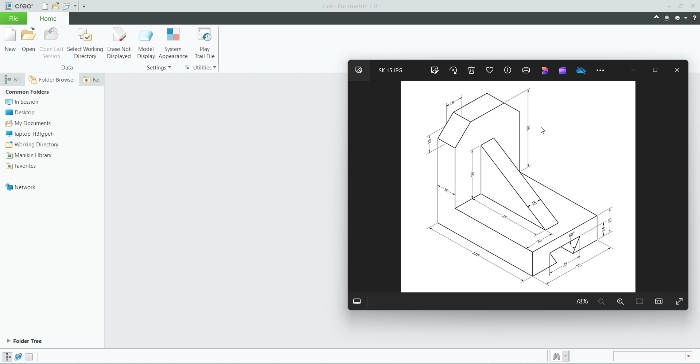The base dimension is 110/75 and there is one more flange 80, thickness is 20.

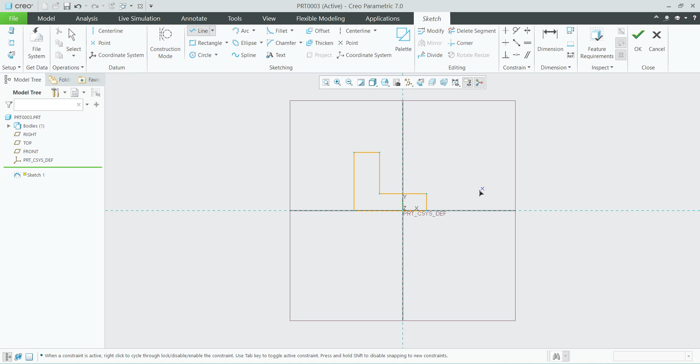Select front plane, sketch, select line, give the dimensions. This is 25 mm, and here to here 20. This length is 110. This is 80 plus 25, 105.

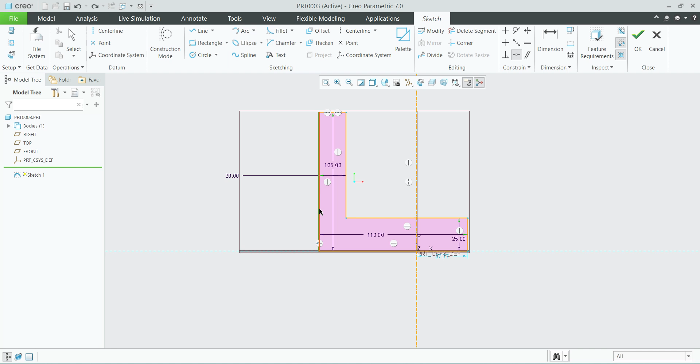Here give the constraint. So finish sketch, select extrude, here select symmetric 75 mm.

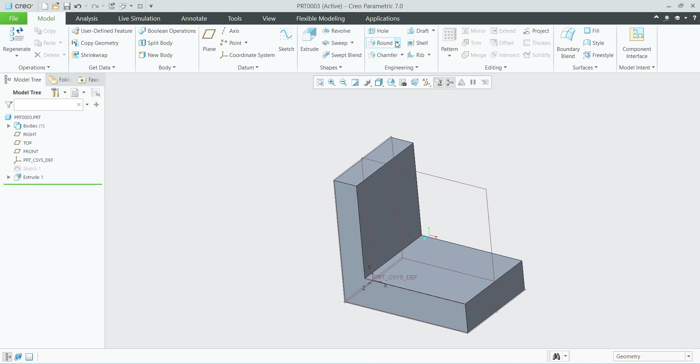Next there is a 18 into 18 chamfer, select chamfer 18 mm, select two edges.

Next there is one rib, thickness is 15 mm, dimension is 50 and 75.

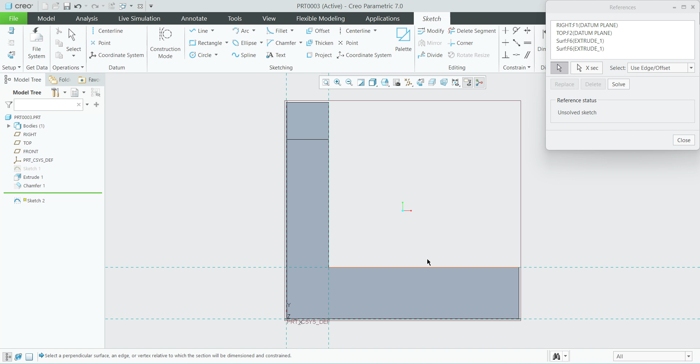Select the plane, sketch, select reference, select line, give the dimension, 75, 50 mm.

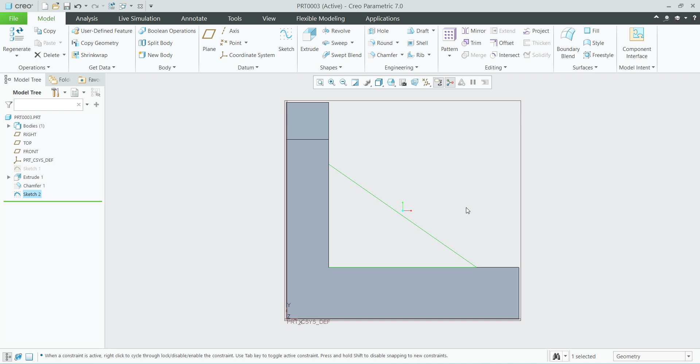Finish sketch, select profile rib, thickness is 15 mm.

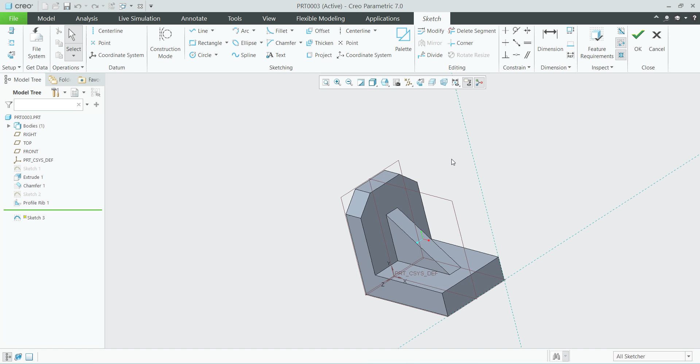Next there is one cutout 35, height is 14 mm. Select this surface, sketch, select the line, select reference first, select this, select line.

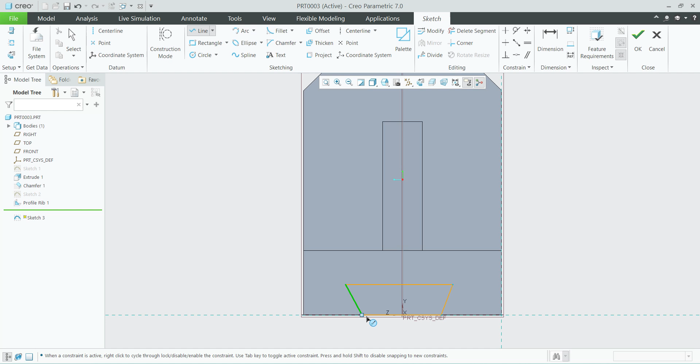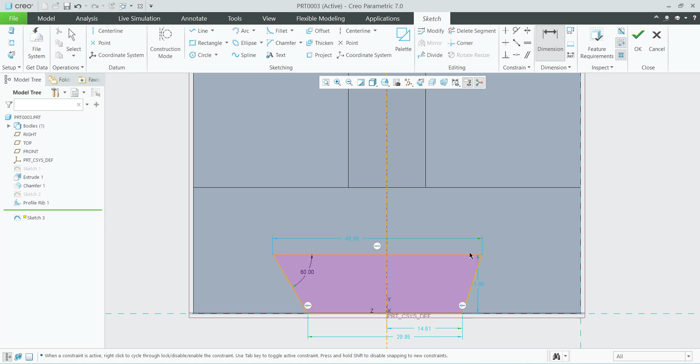Here create center line, give the dimension 35, this is 60 degree, this length is 35, height is 14 mm. This we can give 0.

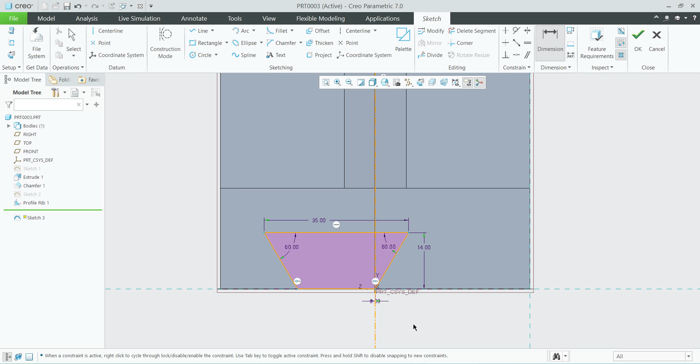Select this, okay, finish sketch, select extrude, remove material, reverse direction, here select through all.

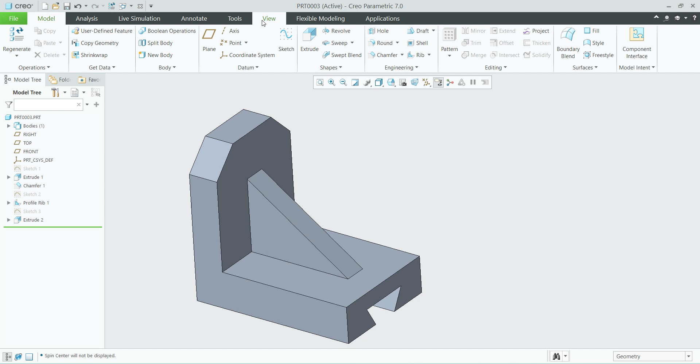We can assign the material here. Go to view, select appearances, here select name and thumbnails. You can see there are all the materials here. You can select which material you require as per your projects.

I will go with aluminum. Select the part, assign.

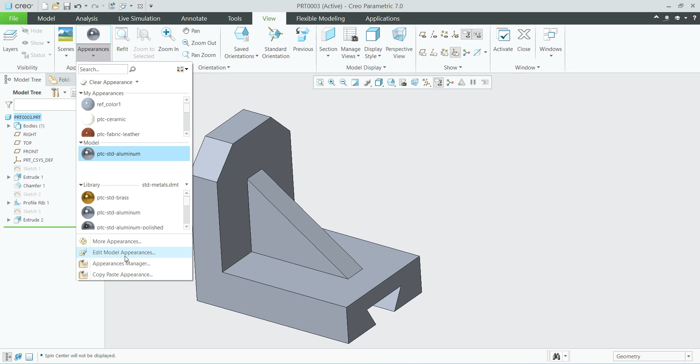So go to edit model appearances, color. We can edit the color here like this.

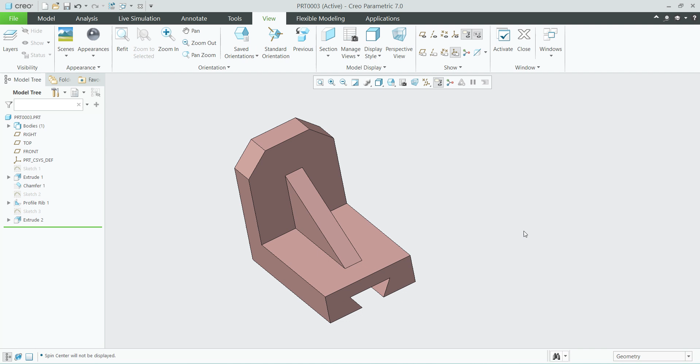Finally, save the part wherever you want. Control S. I will save my desktop. Okay.